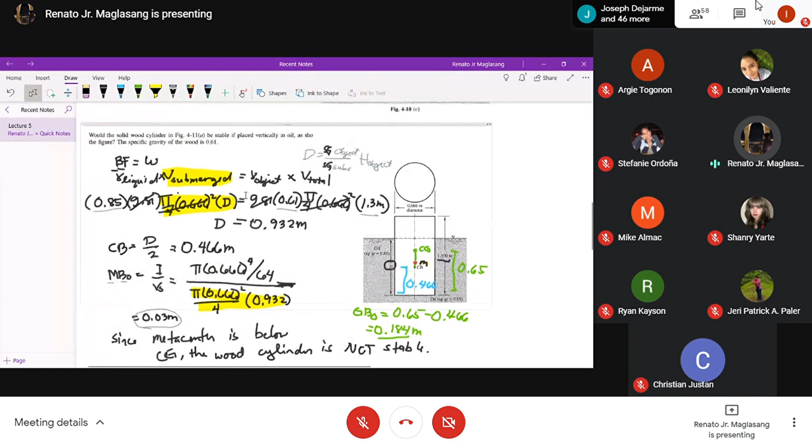If not, we will proceed to kanina problem. So this is chapter 5 na. For the system shown in the...

7-14, pump BC must deliver 5.62 cubic meter, that is CFS of oil, having a specific gravity of 0.762 to reservoir D. Assuming that the energy loss from A to B is 8.25 feet-pound per pound and C to D is 21.75 feet-pound per pound, how many horsepower units must the pump supply to the system to plot the energy line?

So plotted ang energy line kay solution lagi ang energy line. Okay, unsaon man ninyo, given na ka sa kaning CFS, given na Q,

So Bernoulli's energy equation from unsa man, A to C, A to D.

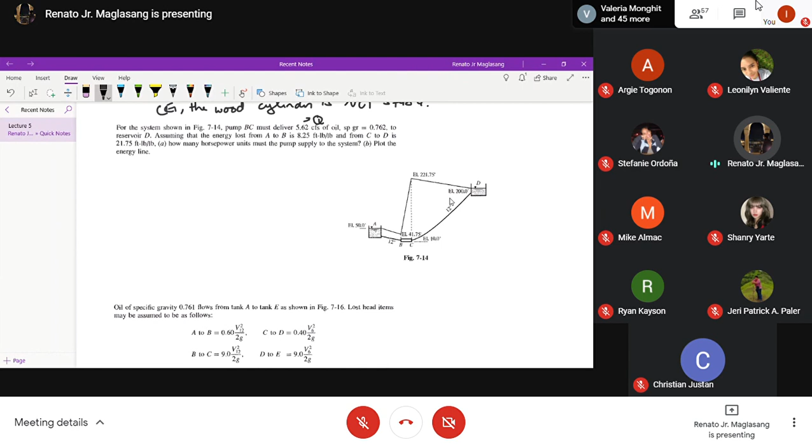So if for example wa pa ni gihatag ning drawing, mura man gihatagan na tag solution kay naa na man tayo sa drawing, kaning sa energy grade line apil naman lagi sila sa kuan, so plotted na man daan. So atong first nga buhaton is magkuha ta sa Bernoulli's energy equation from A to D.

So unsa to kung naa ka sa A, unsa tong naa? You are here in an open reservoir. So elevation 50. So energy from A, remember when we talk energy, that is PA over gamma plus VA squared over 2G plus ZA. So mao ang naa sa A nimo.

Pero again, as what I have told you last meeting, that if we are talking about an open tank, here, this is open, kaya wa man gi-enclose ang kuan, so meaning wa kay pressure. Kaya mabalik sa atmospheric pressure, which is your gauge pressure is equal to 0. If it is in the tank, meaning the water there is static, so wa poy VA squared over 2G. So that would mean ang naa nimo is ZA, which is 50 feet in this problem.

Okay, so gikan ka ni A, mupadulong ka ni B. So gihatagan na og head loss nga kani, minus 8.25. Okay, so head loss na siya from A to B.